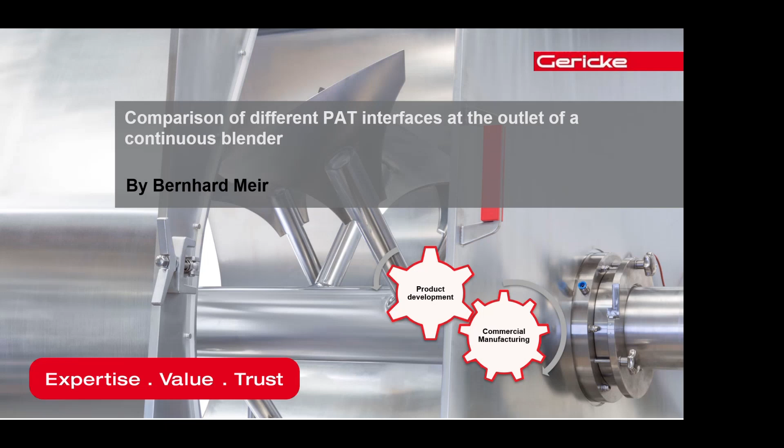Let's see if there's any questions. Please, Giovanna, help me out. Still, I'm going to start.

So we have quite a long history at Gericke, more than 130 years, family-owned business, blah blah blah. 350 employees, and our focus has always been on powder handling and especially continuous feeding and continuous blending of powders. And we've been doing this for 70 plus years. However, we've always been doing that in the pharma industry more than 20 years now, and not very successful, because we talked a little bit about change in pharma industry, and it just takes time for the industry to adopt.

We have quite a lot of locations around the globe. I'm located in Switzerland, in Zurich. That's where our headquarters is located, and we have quite a lot of test centers around the globe. The closest one to Ireland is in Scotland. So if you want to do some trials with our equipment, please contact us, and we can run these trials. And just recently, we opened up a center also in Hyderabad. That's where we're not only doing trials, but we also do formulation development for our customers, and that's in partnership with a company called DFE Pharma, who are a lactose manufacturer.

Looks like there is a pin in my hand. Yes, the blue pins are sales agents. He's useless. He will be visiting you guys on Thursday, so make up your mind yourself. Oh, he's a very nice guy. He's still sober. No? I know, probably not. He better be on Thursday because he's driving.

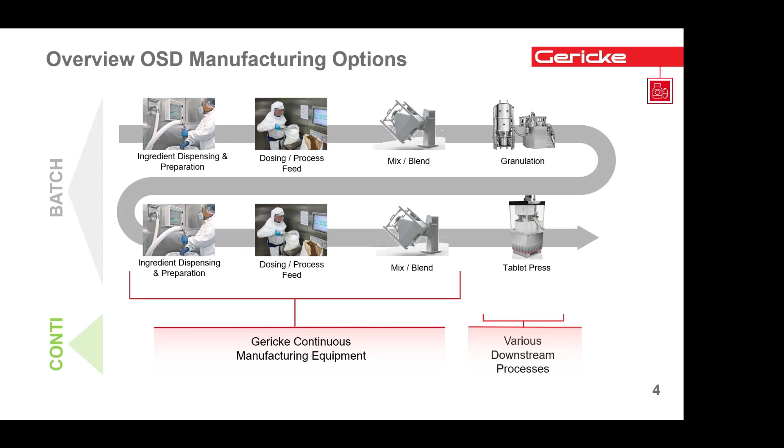And in a very, very simplistic term, we are replacing these manual steps of batch manufacturing with what we call the Gericke formulation skid, or a so-called feeder blender unit. It's basically a skid-mounted system with so-called loss-in-weight feeders. These are screw feeders, and each of these screw feeders meters a constant stream of powders in the right ratio to each other. So you have one feeder for the API, you have one feeder for your filler, your binder, your lubricant, and they feed these in the right ratio to each other into a small continuous blender where we homogenize these powders, and then we can discharge them onto the next process step.

And in between, we can have a little material diversion step, and that's also where we can integrate PAT tools. So, oversimplifying, we basically replace the manual step of dispensing, feeding, blending, and some part of the quality assurance with one of these continuous manufacturing skids.

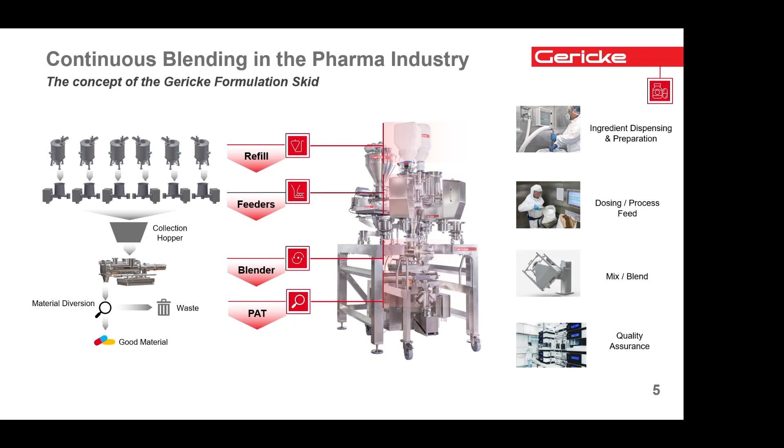And these skids are then integrated with various downstream processes. So in the most simple case, if you look at a direct compression process, we just put the skid on top of a tablet press, but we can use the same skid feeding into a roller compactor or into a continuous twin screw granulator for wet granulation. But this could also be capsule filling, sachet filling, hot melt extrusion, so virtually any continuous downstream process.

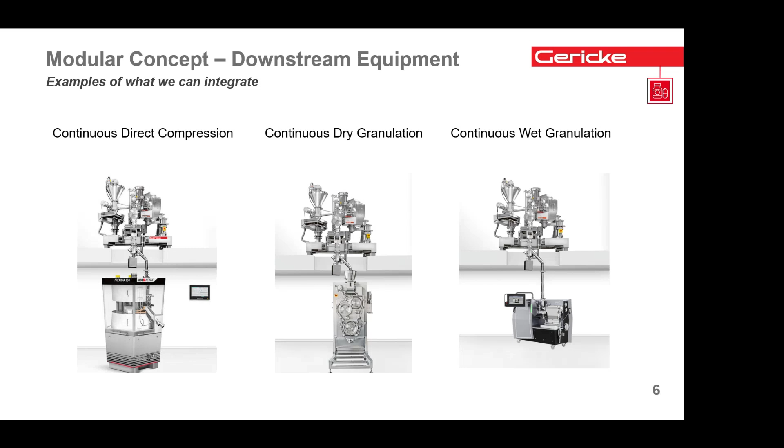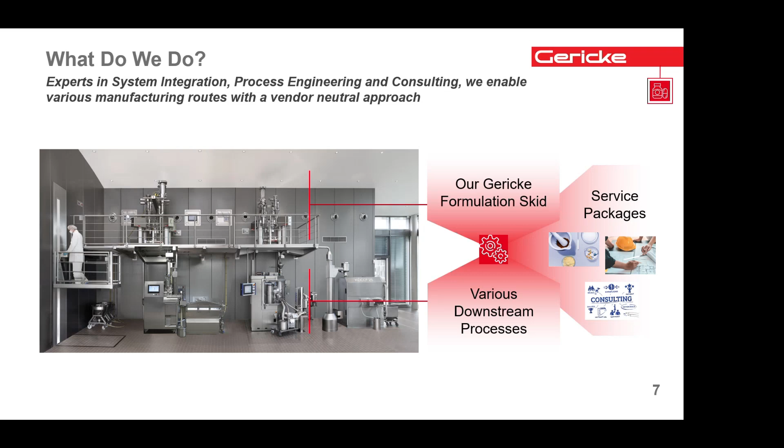Typically we're not only looking at a single unit operation like direct compression, but we also build fully integrated end-to-end continuous manufacturing lines where you start with material dispensing. You have your first feeding and blending unit for the intragranular phase, then a continuous twin screw granulator and continuous dryer. Then a second feeding and blending step where we add the external phases, the lubricant, the super disintegrant. We go into a tablet compression machine and then eventually a continuous or semi-continuous coating step. That's how the full process train of a truly continuous OSD manufacturing line would look like.

As mentioned, we've been doing this for more than 20 years now in the pharmaceutical industry. This actually extends another 10 years, and the graph was still a flat curve. Then about 2017, that's when I started to take over at Gericke. You can clearly see the impact - no, it wasn't due to me. It was just, in general, it took quite a long time for the industry to adopt the new technology.

It's actually quite interesting because it was the FDA pushing companies to do continuous manufacturing. We discussed a bit how people are worried to talk about change with the agencies, but now it was the agencies driving the change. So it's a bit contradicting.

In the recent 10 years, we saw a wider adoption of continuous manufacturing, with a number of more customers adopting it. What was also quite interesting - some customers not only bought one line but bought several lines, and also bought lines for commercial manufacturing. So now the industry is slowly adopting continuous manufacturing, but still it's not happening on a wide scale. Most products out there are still manufactured in batch manufacturing.

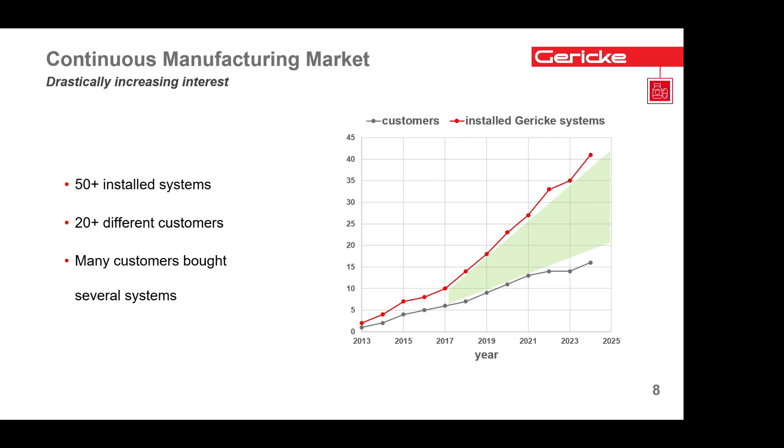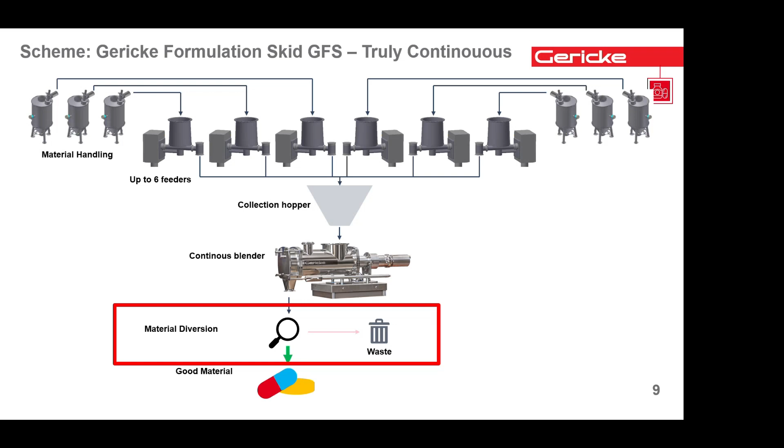Let's go back into the continuous feeding and blending rate. So you have the feeders, the blenders, and then what I'm focusing on is the material diversion at the outlet of the continuous blender. Just to give you an idea how that looks like.

Basically you have the continuous blender here discharging to a little thingy here, which we call the PAT stack. That's where we have the integration of the NIR sensor. Right after that, we have a diversion mechanism. This diversion mechanism automatically switches based on the NIR signal, but it also monitors soft sensors like the loss in weight feeders, continuous blender, and the mean residence time of the system. Based on all of these factors, we can decide are we producing good blend or are we producing wasted blend.

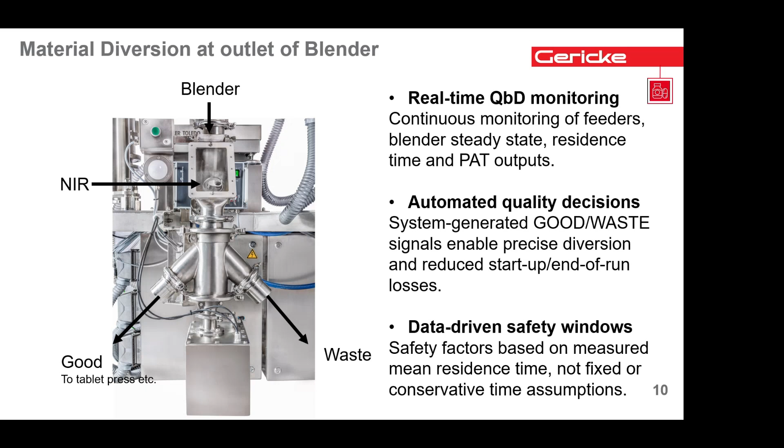Obviously, as you see, it's critical how that interface of the NIR to our continuous blender is. One point is the software integration, which is key, and we have some experts on this here as well. You can just have your PAT instrument as a standalone piece of equipment, but that's not something you can actually use in a continuous line because you need to process that data from the spectrometer in real time to actually make a decision on the continuous blending.

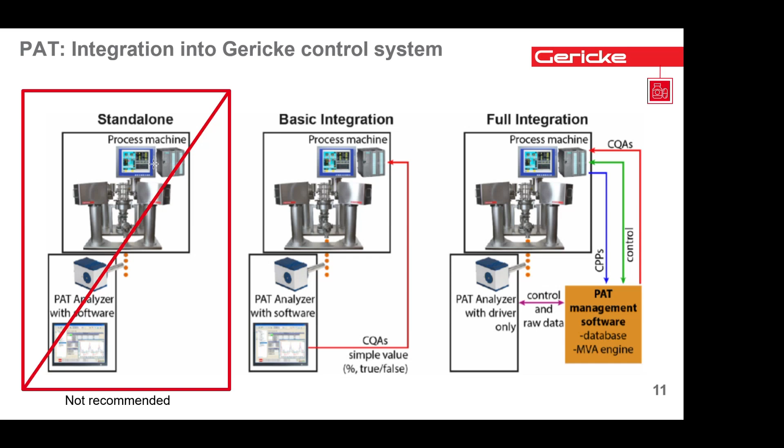Then you can go for a little more what we call the basic integration, where the machine, so the PLC controller of the blender, talks directly to the spectrometer. Or you can have what I think Brad, you're going to present tomorrow on - a PAT management software, where you can actually collect a lot more data, make a lot more sense of the data of the individual spectra, etc. That's one side of the story.

The other story is the mechanical integration of the NIR sensor. This is a little video we saw this morning by Giovanna. This is how we did it back in 2012. Funnily enough, someone in 2024 did a scientific publication on it - a bit late, but already in 2012 we realized that just sticking the probe into a little chute without any mechanical wiping, without any sample presentation, leads to something like you see in the video. You see quite a lot of pulsation, the flickering light of the NIR sensor, and it's kind of obvious - I don't need to read a scientific publication that this is probably not the ideal integration of an NIR sensor.

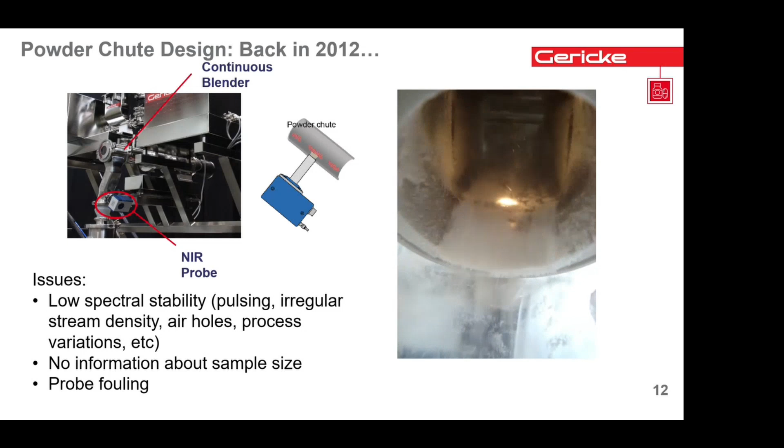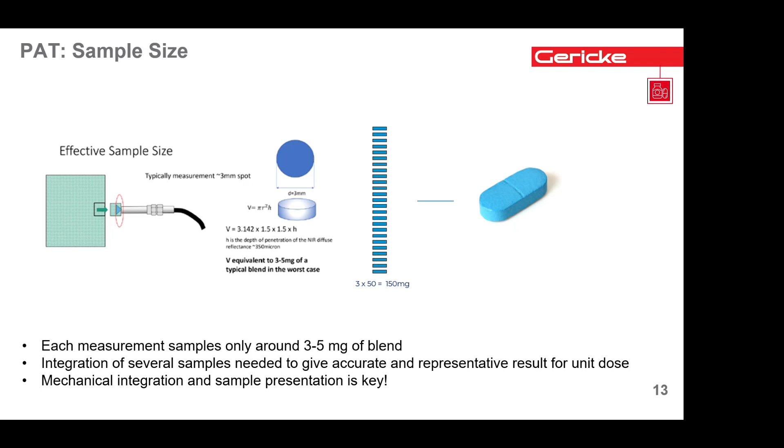Another quite important topic I think Eric presented on as well is the sample size. If you have pulsating powders moving past that sensor, it's very difficult to actually know how much sample you're measuring because you have no idea about the speed of the powder. You're not sure if you're measuring air or measuring powder. So it's very important for the sample size calculation to have a good representative presentation of the powder in front of the NIR.

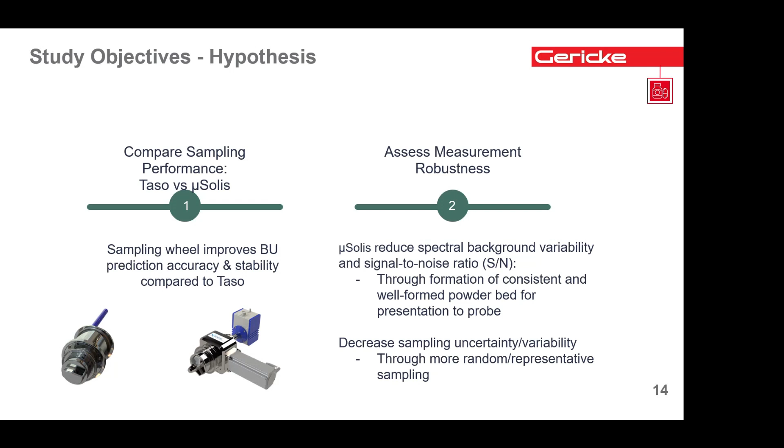That's where we did the study together, and thank you to Joanna for doing all the work and presenting all the data. We compared the TASO with the µSolis, and we challenged the system with the hypothesis that the µSolis reduces the variability of the spectra, the signal to noise, and eventually also gives us more random, representative sampling in front of the NIR.

How did we do that? Basically, we used the setup we just saw at the beginning with the NIR post continuous blender. We ran 3 different blends with various concentrations of paracetamol, or APAP, ranging from 2.5 to 7.5%, with lactose and MCC as well as magnesium stearate in that blend. We used the Sentronic SentroPAT with 20 milliseconds at 150 acquisitions, whatever that means.

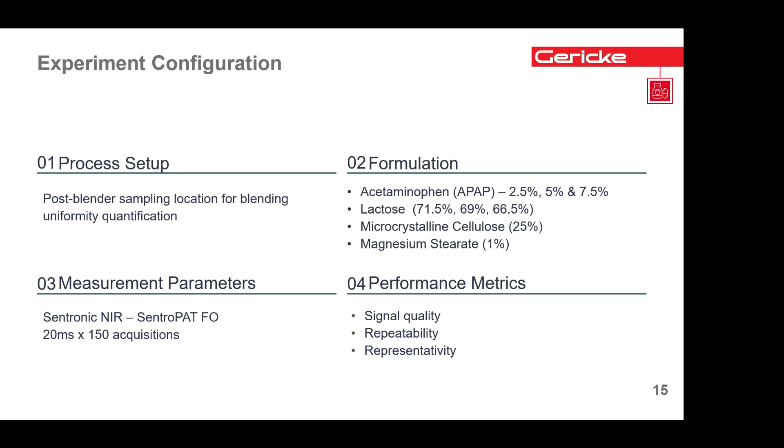Again, I'm not a PAT expert, but the performance metrics we looked at are signal quality, repeatability, and representativity of the data collected. As mentioned, we used the µSolis with the chute, the little box where we integrated the NIR at 30 degrees. That's our standard setup, and we did not vary that. We had the probe at the 1 o'clock position, and we ran at a relatively low speed of 10 RPM because we were running the blender also at a relatively low speed of 20 kilograms per hour.

We compared this to the TASO, where we had an acquisition time of 3 seconds - 3 seconds on the NIR, 3 seconds off the NIR, then switching back, and then spectrometer, which I mentioned to you.

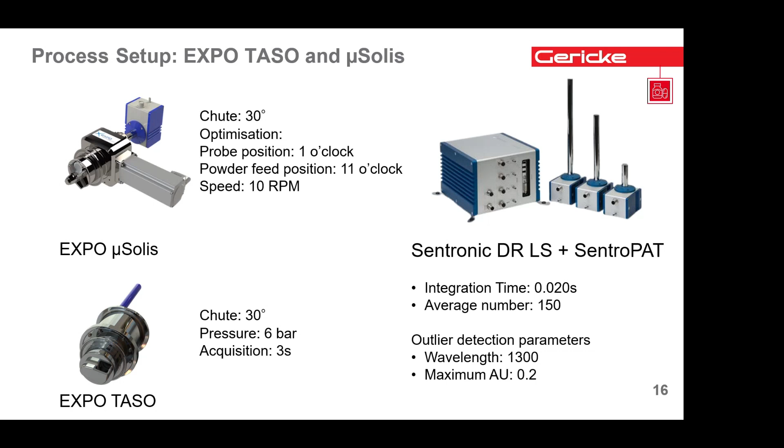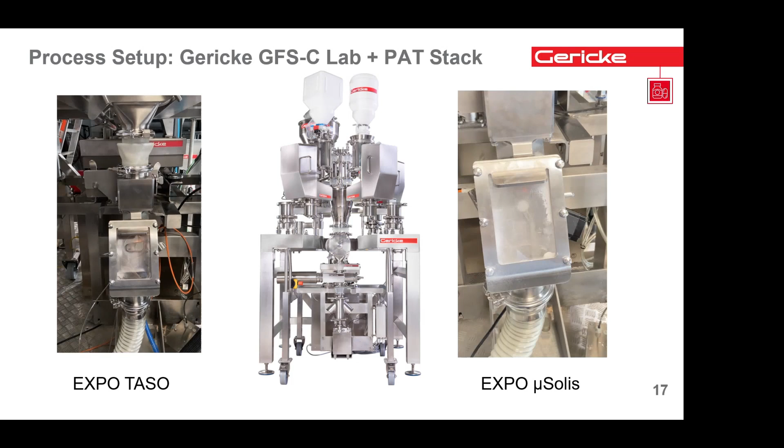These are some videos of the setup. On the left, you see the TASO at the outlet of the blender - you can see the little spoon flicking, 3 seconds on, 3 seconds off. You can compare that to the µSolis on the right, running at 10 RPM. This is something you see in the lab, and we also see in various presentations.

On the trial setup itself, we actually used pre-blended material, so we didn't want to see the variations of the loss-in-weight feeders or the continuous blenders. We pre-blended the material, charged it into a single loss-in-weight feeder, which metered the material into the continuous blender and then discharged it on the NIR.

So we could mimic the discharge behavior of the continuous blender without worrying about any feeder or blender variations. I think someone had questioned this morning about this pulsation you saw in some of the videos that Novo presented - that's the discharge behavior of the continuous blender.

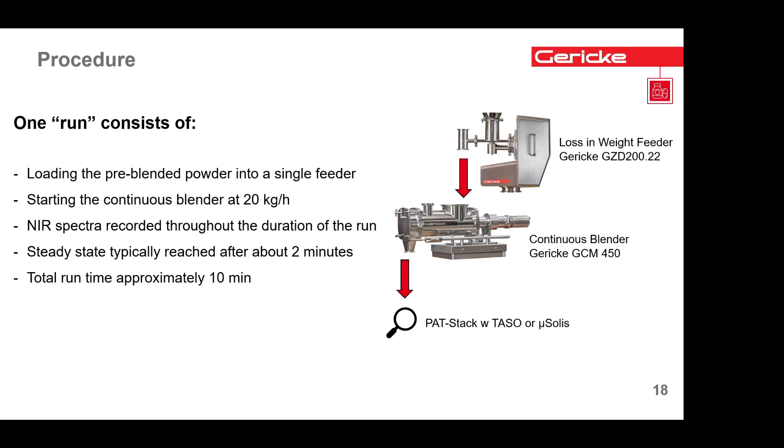We also waited about 2 minutes for the continuous blender to reach a steady state, so we didn't capture the startup behavior, and then measured for about 10 minutes. We did quite a long run compared to the studies where you manually poured the powders over the TASO or the µSolis.

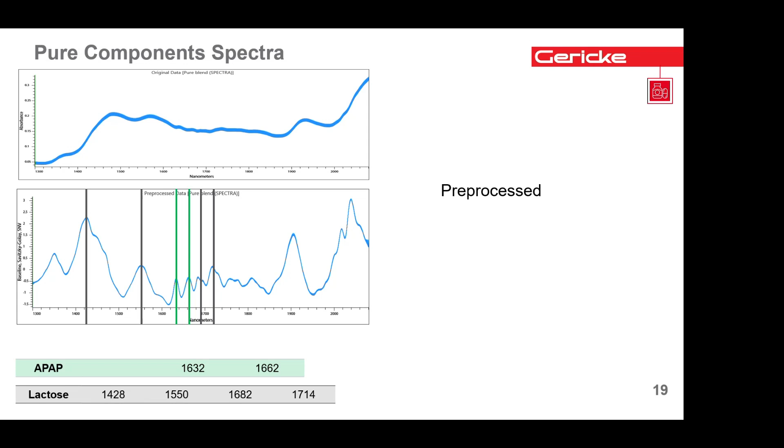So first of all, Giovanna looked at the pure components, and this is actually a spectra from the blend. We could quite well distinguish between the lactose and the paracetamol. We also could see, though I unfortunately don't have it on here, the wiper material, I think at 100, 1300 and 1700 nanometers.

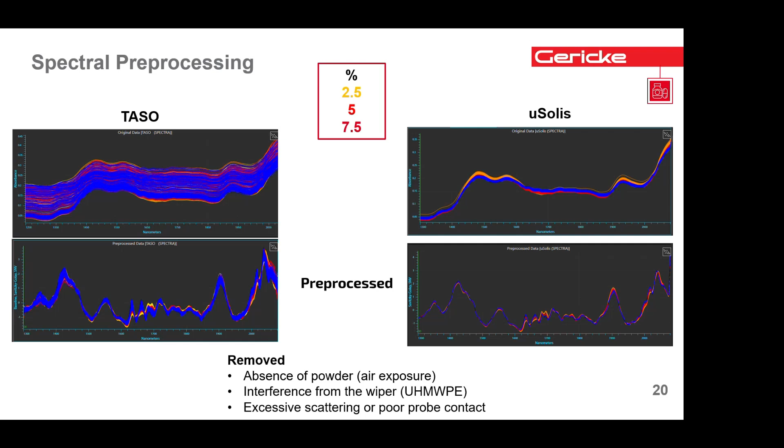We also looked at all the raw spectra. You see a lot of variation here, and a lot less variation here. This was also after pre-processing, so we removed everything where we didn't measure powder but measured air, and removed interference from the wiper material, as well as excessive scattering or poor probe contact. Even as a non-PAT expert, you could see you get much more consistent spectra with the µSolis compared to the TASO.

So the baseline and signal-to-noise ratio was much better on the µSolis.

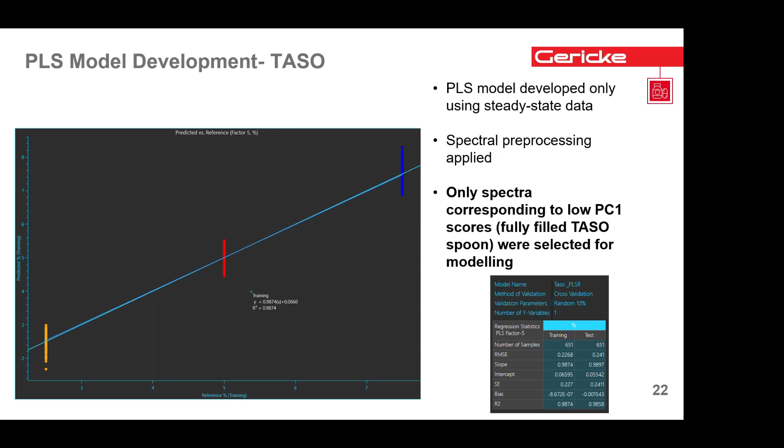However, we also did a PLS model for the TASO, and it was relatively okay, I would say. It's a linear curve, and we had an R square of 0.987, so not too bad. But we had to exclude quite a lot of spectra from the TASO because of that inconsistent filling of the spoon.

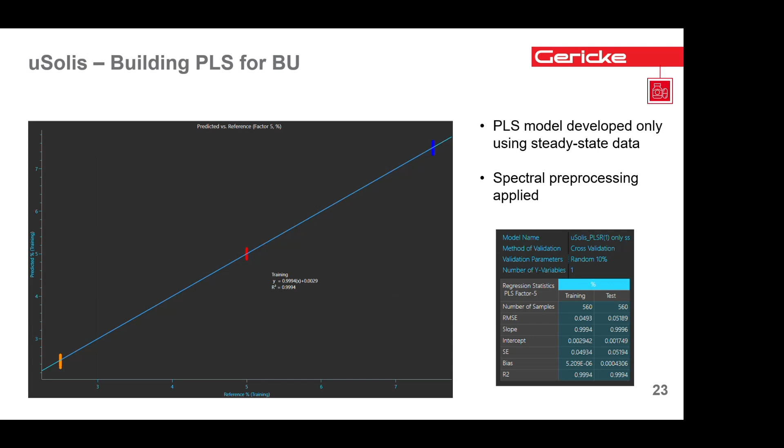Then we also built a PLS model for the µSolis, same blends, much nicer curve. The R square was 0.9994, a lot better than what we had on the TASO.

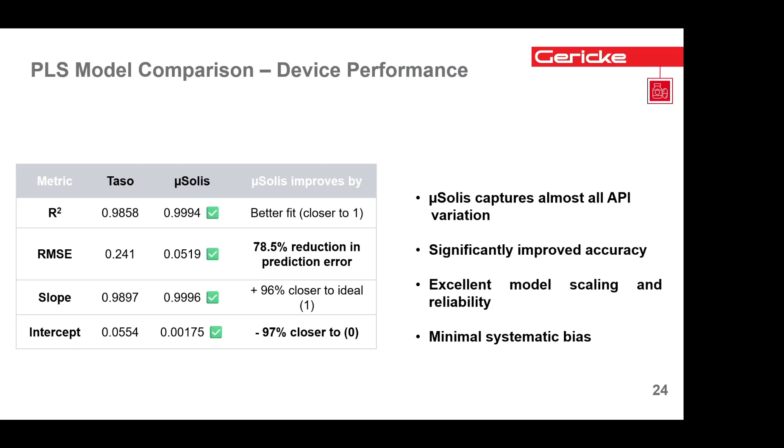If you compare the two PLS models with each other, the R square is much better, the standard error is also much lower, and the slope is still straight. But the intercept was also closer to zero, as you would expect. Overall, the PLS model on the µSolis was much better than on the TASO.

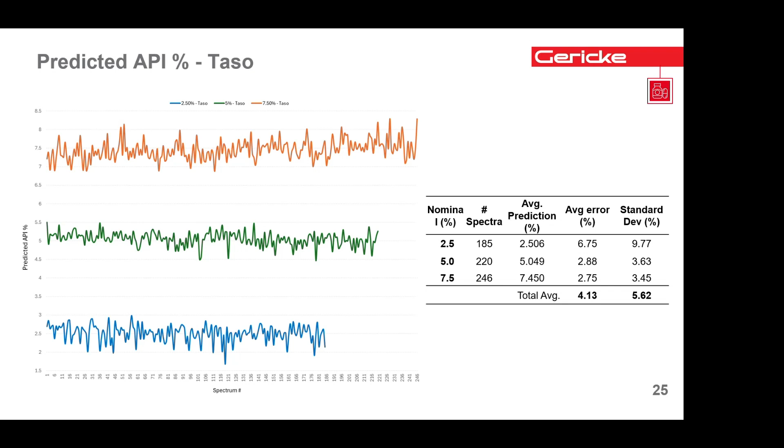Then we used that PLS model to get quantitative results on the three different API strengths: 2.5, 5, and 7.5. The results were where you would expect, at 2.5, 5, and 7.5, but you see quite a lot of variation in the results. These are not linked to any feeder or blender variation, because we're using pre-blended materials and we knew the blend introduced to the machine was homogeneous. We had an average error of 4.1% and a standard deviation of 5.6%.

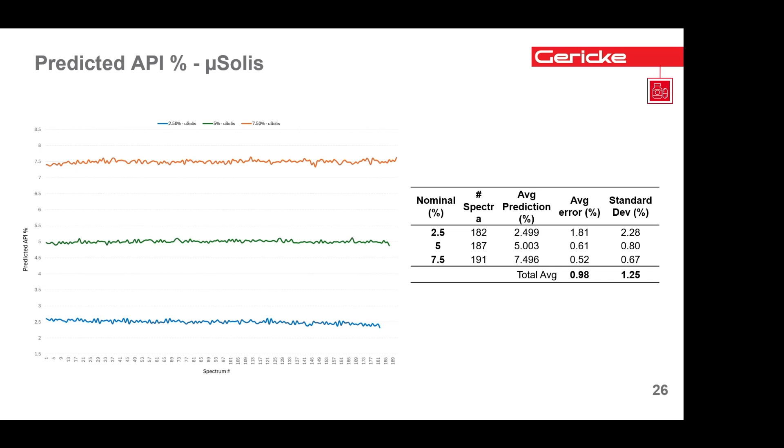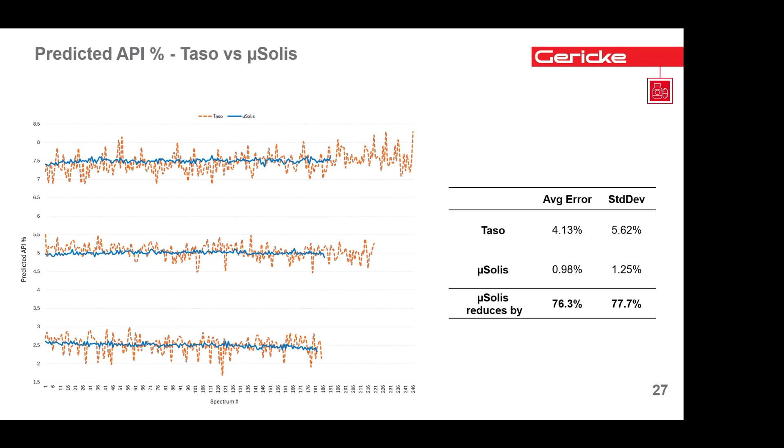If you overlay the two graphs, on average we're in the same place, but you see a lot more variation with the TASO compared to the µSolis. In quantified numbers, the average error was reduced by 76% and the standard deviation by 77%.

So overall, our hypothesis that the µSolis is a better tool to have at the outlet of a continuous blender was confirmed. That's also what we would recommend our customers to use instead of the TASO.

One reason is that we have a more consistent powder bed in front of the probe. You saw that in the videos too, where if you rotate at the right speed, you always get good coverage of the probe. Whereas with the TASO, you have to wait, then flick, then wait again. Also, you're not measuring just a static bed when holding the sample in front of the NIR with the TASO, but actually moving powder in front of the NIR sensor. You get a lot more good spectra as well.

As mentioned, the µSolis would be the preferred solution for application at the outlet of a continuous blender.